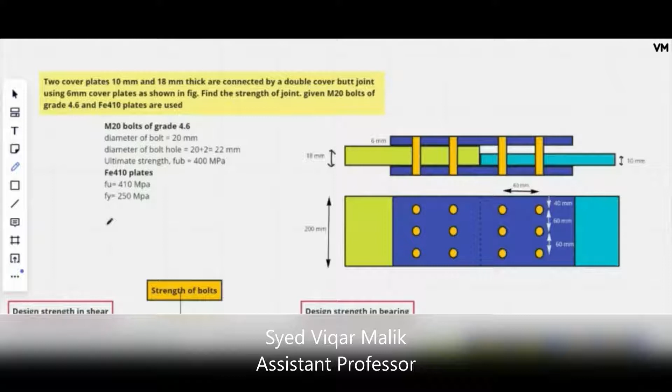In today's topic, we are going to learn how to determine the strength of a bolt connection. Generally, the type of connection we have selected here is the bearing type of connection.

So let us take the question: two plates of thickness 10 mm and 18 mm are connected by double cover butt joint using 6 mm plates as shown in figure. Find the strength of joint given M20 bolts of grade 4.6 and Fe410 plates are used.

For M20 bolts of grade 4.6, the diameter of bolt will be 20 mm. 20 represents the diameter of bolt, whereas the diameter of bolt hole gives us the diameter of bolt plus clearance, which we obtain from Table 19 of IS 800:2007.

The grade 4.6 - the 4 represents the ultimate strength, which is about 400 megapascals. Given that Fe410 plates are used, the ultimate strength is 410 megapascals and the yield strength will be 250 megapascals.

Apart from this data, it has also been given that one plate thickness is 18 mm, whereas the other plate thickness is only 10 mm. These two plates are connected by two cover plates of size 6 mm.

In this condition, they have given the pitch as 60 mm, end distance as 40 mm, the gauge length as 60 mm, and edge distance is also 40 mm.

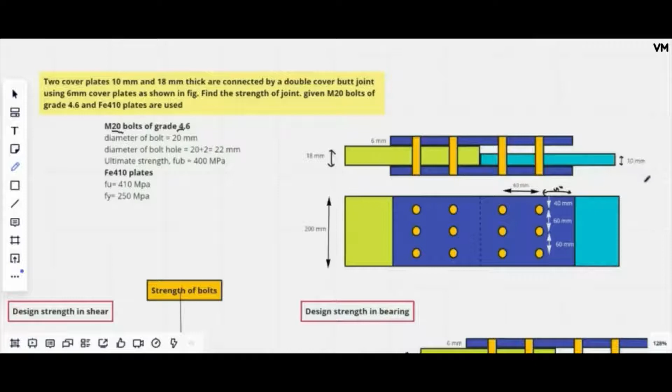In these cases, what we will generally do is select some packing plates. So let us provide some packing plate. Generally, the size of packing plate required in this problem is about 8 mm.

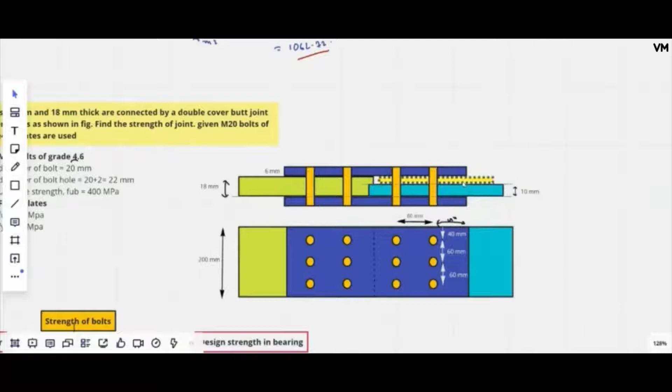Packing plates are used to provide a stable connection between the bolt joint. Let us assume now we have provided some type of packing plate and riveted or bolted it with some connection.

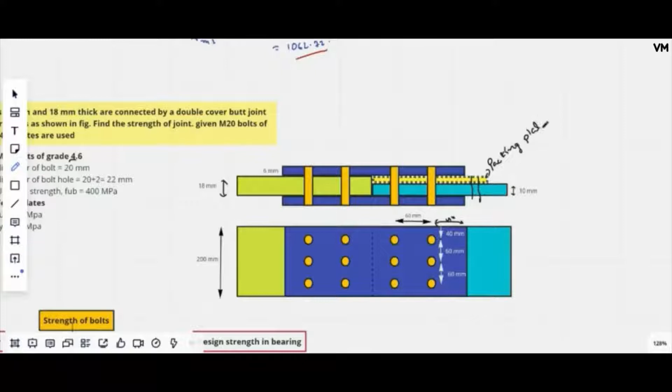The size of packing plate we need to determine - thickness of packing plate required, which must be equal to: 18 minus 10. One plate thickness is 18 mm, other plate thickness is 10 mm, and this gap should be filled by packing plate, which gives us about 8 mm. So the thickness of packing plate will be about 8 mm.

In this case, we are going to calculate the strength of joint. So what could be the maximum strength the joint can attain?

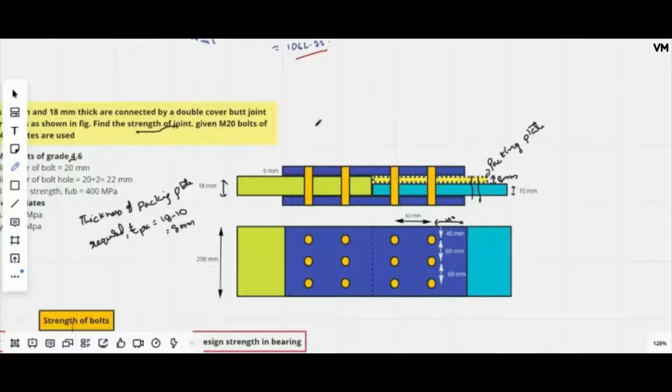When we are about to calculate the strength of joint, it must be focused on two things: how the connection is going to fail. As we have seen in earlier videos, especially in the case of bearing type of bolts, the connection will fail with respect to the bolt strength or with respect to the strength of plate.

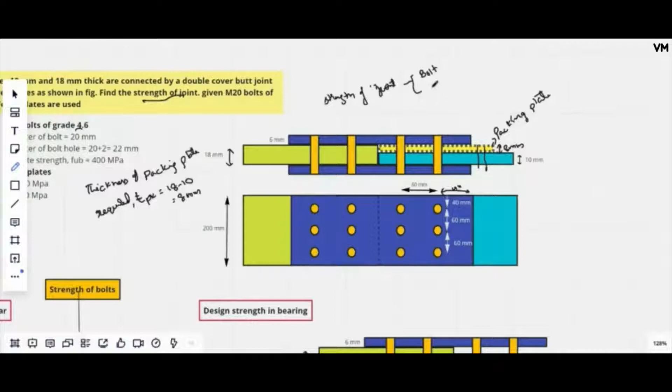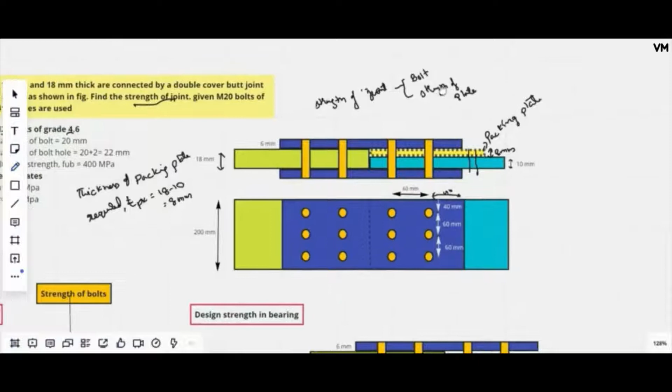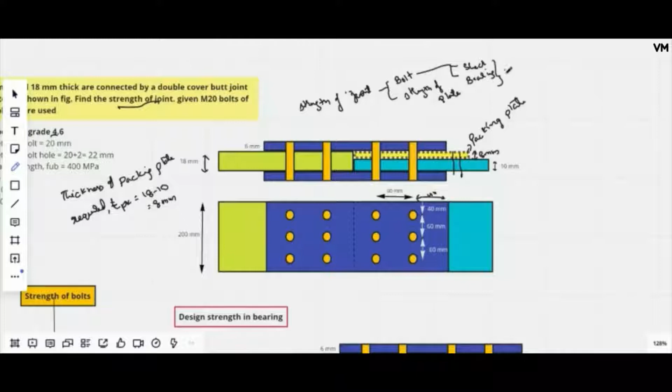Whenever we talk about the bolt strength, there are two different criteria in bearing type of bolts. One, we need to check it with shear, and another one, we need to check it with bearing. The minimum of these values we need to consolidate to calculate the strength of joint. The same procedure will follow over here.

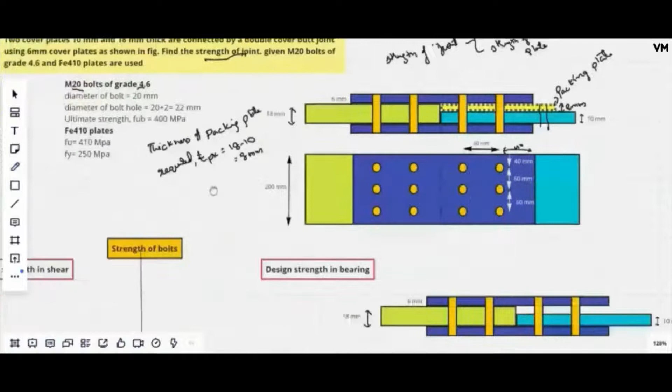First, we will calculate criteria one, which is about strength of bolt. So when we are about to calculate criteria one, we need to check the design strength in shear as well as the design strength in bearing. So let us start with checking the design strength in shear.

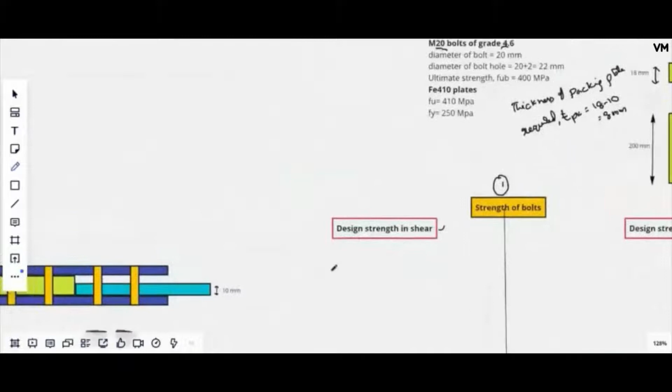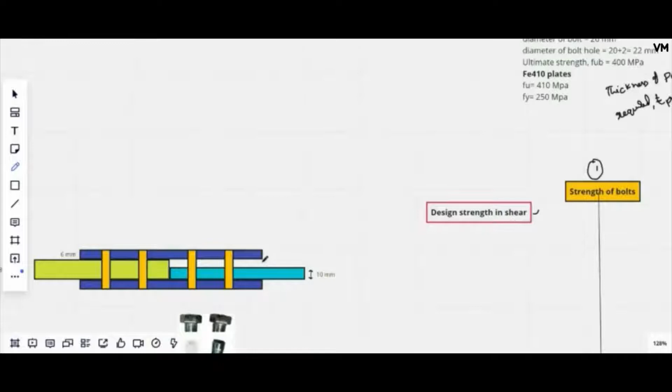Generally, I have removed the packing plates because the purpose of packing plate is just to cover the space. Packing plate does not influence any design requirement, does not initiate any design requirement. So generally, there are two main plates, and these two main plates only should undertake all the loads. The packing plate is just used to pack the gap available here - it does not contribute much towards the design strength.

The formula we get from the code is: VDSB must be equal to FUB over root 3 gamma MB, times NN Anb plus NS ASB. This is the formula given in clause 10.3.3. Apart from this, there are three reduction factors: beta LJ, beta LG, and beta PK.

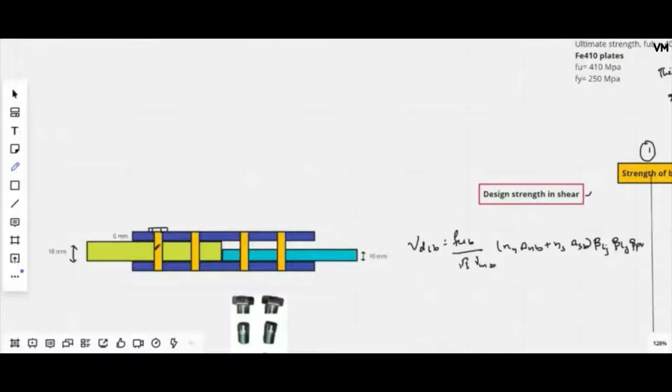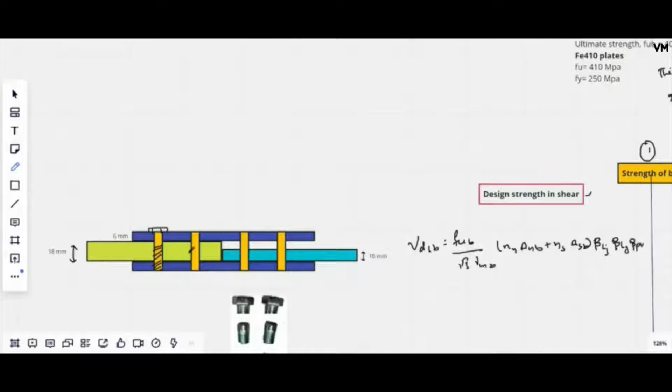So first we will see how the failure is occurring here. What I am considering here is this bolt, the threaded portion, this is my shank area. Shank area consists of threaded portion as well as non-threaded portion, the plain portion. This is totally in the shank, which consists of threaded portion and non-threaded portion. So I am assuming that my bolt is placed this way.

Now we need to identify how many shear zones can be generated here. Generally, when the forces are applied, the plates try to move in the direction of force, creating some type of shear. Similarly, here we are about to see two shear zones. This is one shear zone and this is the other shear zone.

As for my consideration, there are totally six bolts, but we are only about to find for a single bolt, for only one bolt. For one bolt there are two shear zones. So it is important for us to identify how the shear is intersecting with our shank.

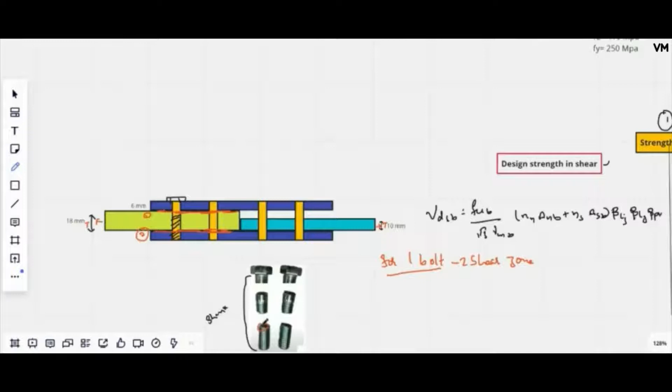If it is intersecting with the threaded portion, see here, the failure has occurred here. This is how the failure will be in the case of shear. When we talk about shear, this is the type of failure, how our bolt will fail. Generally the area here will be our fracture surface, and the surface shape will be circle.

That is why in the place of Anb and ASB, we will take the area of circle, which is pi by 4 d square. Whereas when we talk about net area, some percentage of area has been reduced, which is about 0.78 times of pi by 4 into d square.

If the shear force is intersecting the threaded portion, NN value will become 1. And if shear is intersecting the non-threaded portion, here also the shape will be circle if we see it from the top. Similarly, this is for ASB. We can clearly see that the failure has occurred in the non-threaded portion. When the failure occurs in the non-threaded portion, then NS will become 1.

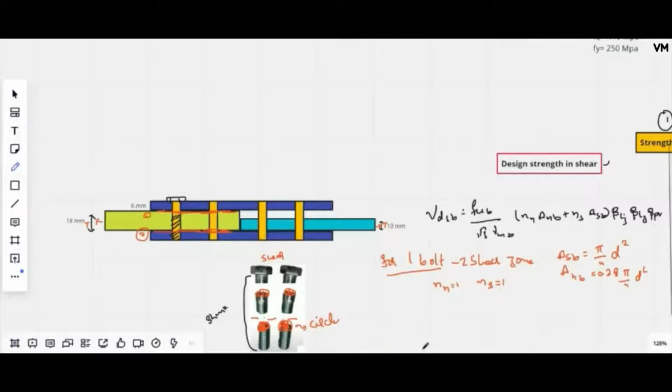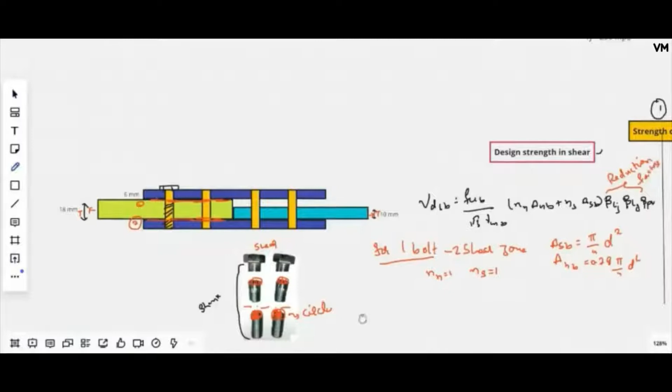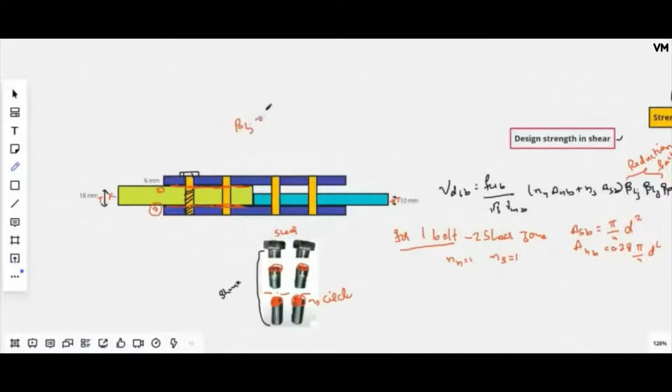So this is only for a single bolt. Now let us come across the three reduction factors. These are our three. When we see the three reduction factors, the first reduction factor is beta Lj.

Beta Lj is for long joints. The length of connection in this problem, given as 60 mm, is nothing but the distance between the first bolt to the last bolt. That is what will be the length of connection. In this case, the length of connection is about 60 mm. Beta Lj exists when length of connection is greater than 15 times the diameter of bolt. If I calculate 15 times the diameter of bolt, which is 20 mm, this value will be 300 mm, which must be greater than 60 mm. Hence, beta Lj value will be 1.

Now there is another reduction factor, beta Lg, which is for grip length. Let us see what is the total grip length we can get here, which is about 6 mm, 18 mm, and 6 mm. 12 plus 18, which is about 30 mm. The beta Lg factor occurs when the length of grip exceeds 5 times the diameter of bolt, which is equal to 100 mm. In this case, it is not exceeding, hence beta Lg value will also be 1.

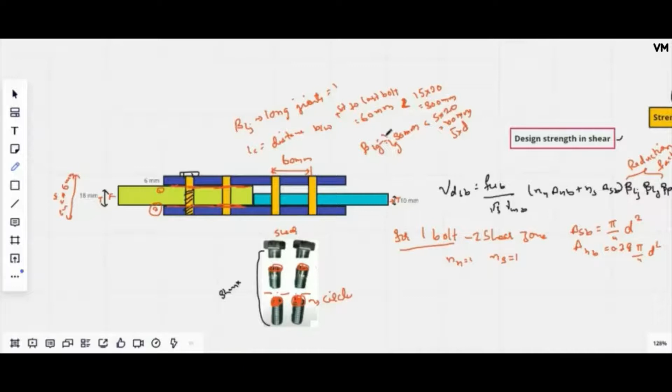So there is one more reduction factor, which is beta pk. Beta pk is for packing plates.

This type of reduction factor occurs only when we are going to provide some packing plates, and in this problem we have provided some packing plates. The clause suggests that if thickness of packing plate exceeds 6 mm, then we need to consider this reduction factor.

In this case, we have provided the packing plate which is of 8 mm. So beta pk formula which we will get from code will be 1 minus 0.0125 TPK, where TPK is thickness of packing plate.

So there is some amount of shear which is reduced because of this packing plate: 0.0125 into 8, which is upon 0.9. So if I substitute all the terms in the formula, which is 400 by root 3 into 1.25, NN is 1, 0.78 times of pi by 4 into 20 square plus pi by 4 into 20 square into 0.9.

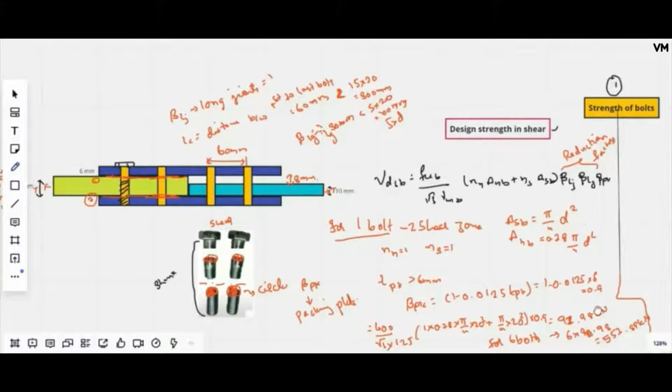Now let us see the design strength in bearing. From the code, we can see the formula for design strength in bearing, which is VDPB, which is equal to 2.5 kb dt Fu by gamma mb.

So kb is again minimum of E by 3D naught, or P by 3D naught minus 0.25, FUB by FU, or 1.

So this value, end distance given in the question, is about 40 mm, 40 by 3 into diameter of bolt hole, which is 22 mm. This is pitch, which is around 60 by 3 into 22 minus 0.25. And if we calculate all of these, we will get kb minimum, which is equal to 0.6061.

Now we are going to substitute our values as usual. VDPB,

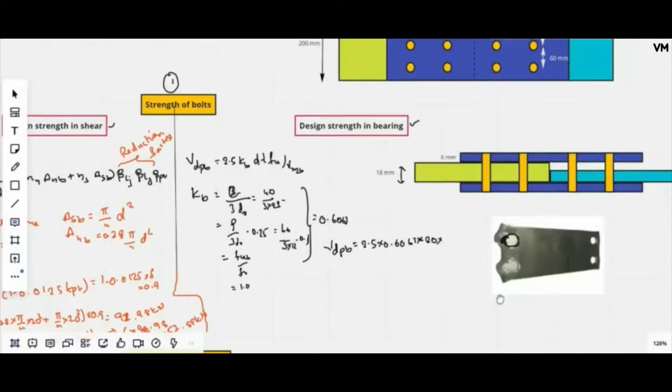Now, how to consider thickness? What could be the thickness here? See, in this case, when the forces are applied in this direction, what happens generally, the plate will tend to move in this direction.

The movement of plate will be counteracted by the bolts in this direction, and due to connection of plate here, the bolt will not move in this portion. Actually, the bolt will try to maintain equilibrium. That is why it will imply the forces in opposite direction in the top two plates.

So it can be seen that whenever we are going to calculate the thickness here, we have two conditions. One condition is from here. So we need to see the direction of force, the bearing. Thickness here is nothing but summation of thickness of plate experiencing bearing in the same direction.

So there are two different directions here. This is our first direction and this is our next direction. In this case, we have two directions here: this is our one direction and this is our other direction, which is moving in two different directions.

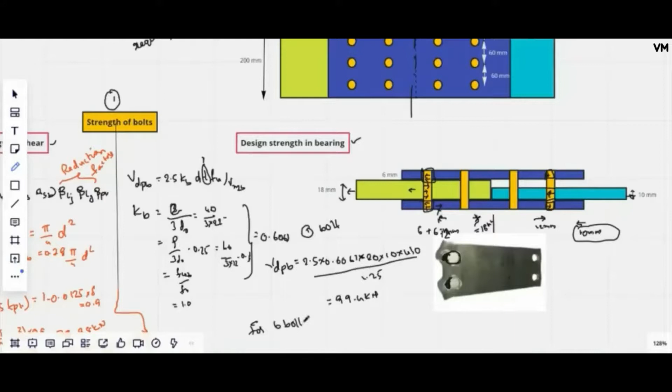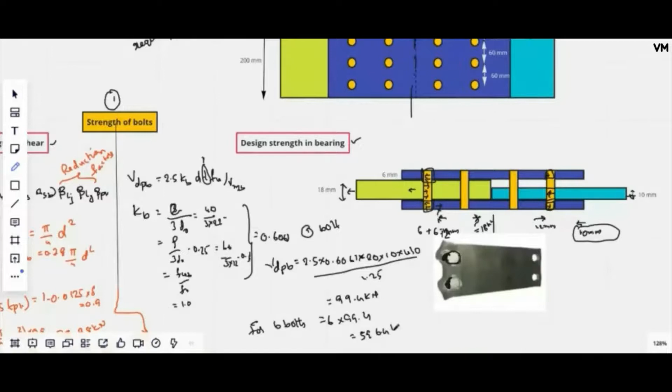This is only for one bolt. As we can see, there are a total of six bolts in a connection. See here, this is the main plate - this is one side and this is the other side. So in this main plate, we have six bolts. For six bolts, this value will become 6 into 99.4, which will be around 596.4 kilo newtons. Now let us see the strength of plates in the joint.

When tension force is applied on our structural steel member, failure due to rupture comes into the picture. It will start from this position, and the failure will be perpendicular to the application of force. So it means that in this part of the structure, there will be three bolts as usual, and we can see the failure will occur like this. The plate will tear off in this manner.

This is the next position of plate. If we see the torn position of plate, it will look in this way. And the plate tears in this manner. So this is our fracture surface, what I have drawn in a darkened way.

The thickness of the plate is T. Actually, I have drawn this as a 3D view. The thickness here will be T, and the total width as we know it is 200 mm.

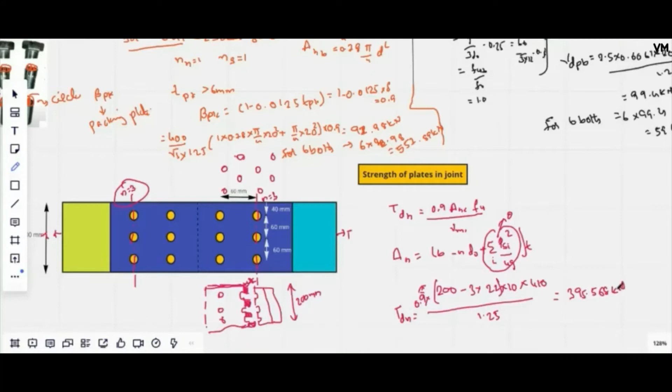kilonewtons. Okay, so here we check two criteria. We calculated the strength to find the strength of the joint.

We have seen the two criteria. First, we calculated the strength in the bolt - these are all the possible cases of failure - strength of bolt, and the next one, strength of plate in joint. So when we see the strength of plate in joint, we got this value as 395.568 kilo newtons. Whereas the strength of bolt, again we have to go through shear and bearing.

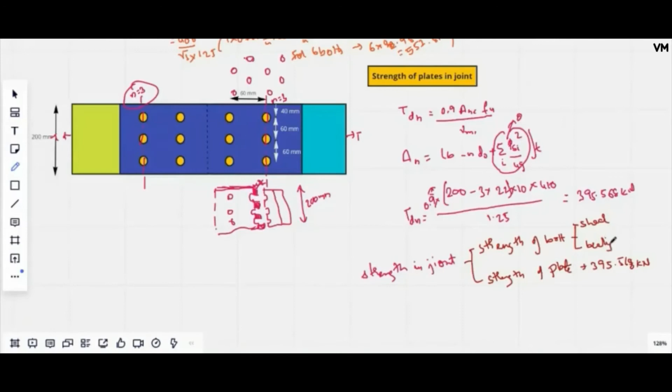As this is a bearing type of connection, we have to check the plates, and it can also be seen that slip is allowed here. So there will be two different formulas, two different natures of values we need to consider. In the case of shear, we got the value as 557.88 kilonewtons, whereas in the case of bearing, this value will be 596.4 kilonewtons. So the minimum of these three gives us the strength of joint.

So from this, I can assume that the strength of joint will be equal to 395.568 kilonewtons, which is with respect to strength of plate. So before the bolt fails, the plate is failing in this case.